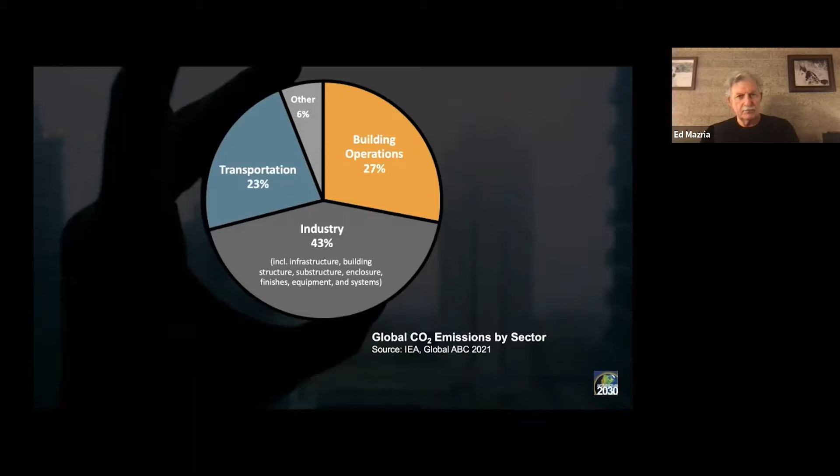This is how we usually see global CO2 emissions by sector. Building operations is 27%, transportation 23%, a little bit less, and then industry is the big one at 43%. If we tease out the building sector and the built environment from industry, then we see that building materials and construction, the core and shell, is another 10%. And the additional construction, site work, infrastructure, HVAC, that's an additional 10% as well.

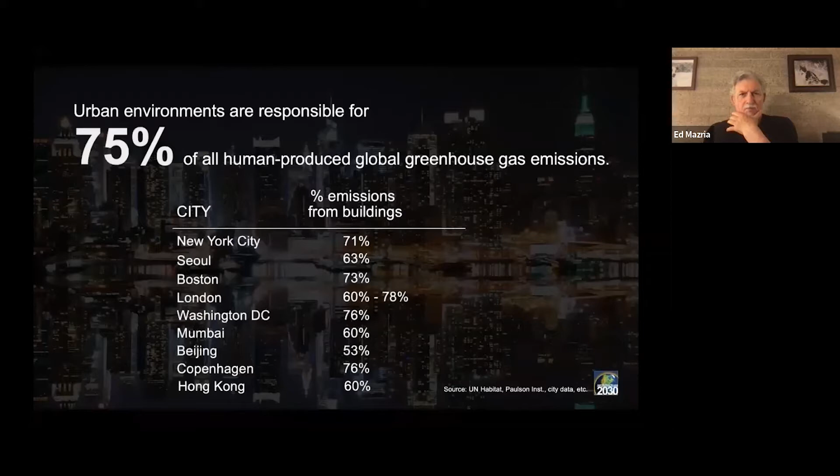So we see that almost half of all global emissions are attributed to the built environment, and most of it to buildings. We also know that urban environments are responsible for 75% of all human-produced global greenhouse gas emissions. And of that, most comes from buildings in urban environments, in cities. You could see New York City, 71%, Copenhagen, 76%, Hong Kong, 60% of all its emissions come from its buildings. So buildings are critical in getting our emissions down.

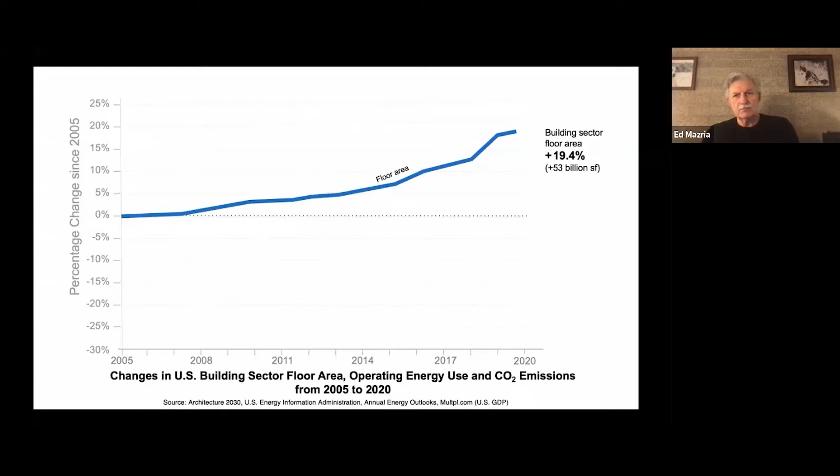Now, this is something historic that has taken place since 2005. This is the US. The US since 2005 has been building. We had a little slowdown with COVID, but we continue to build. From 2005 to 2020, we added about 53 billion square feet to our building sector. Our buildings' floor area grew about 19%.

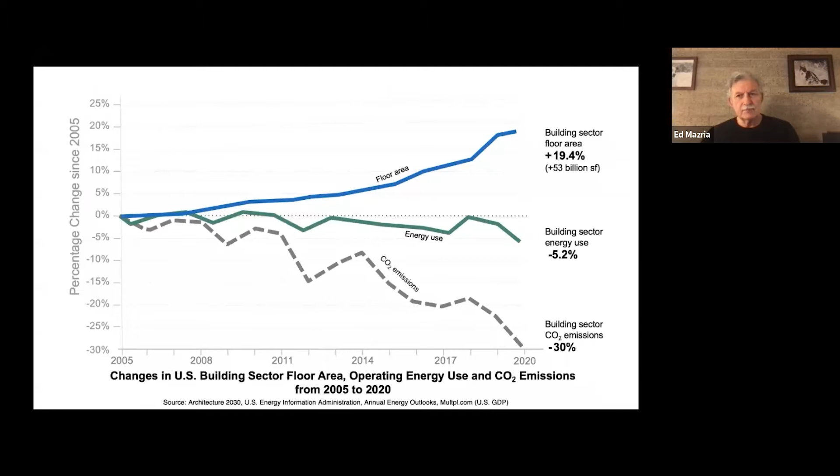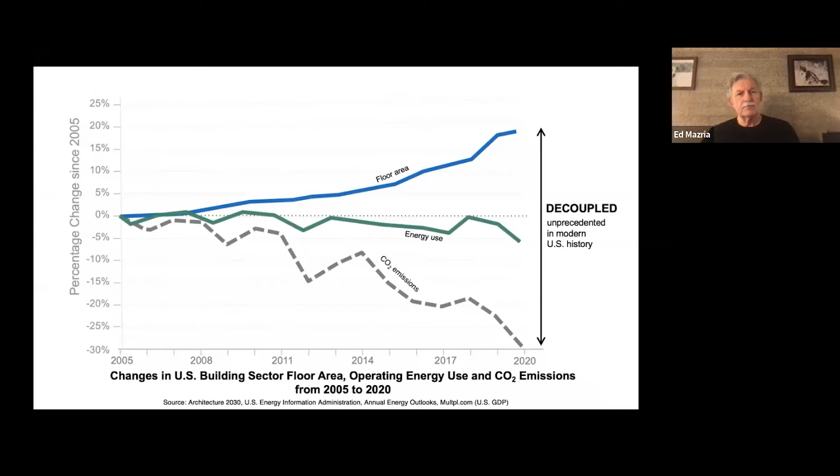This is energy use and CO2 emissions in the building sector. Our energy consumption in all our buildings in the US from 2005 to 2020 went down about 5%, and emissions dropped way down, 30%. So our emissions today are 30% below where they were in 2005 in building operations. That decoupling of being able to build, grow, and reduce emissions is historic. We have never seen that happen before. If you build, energy consumption goes up, emissions go up, that's the way it's always been. But all of a sudden, we're seeing a disconnect.

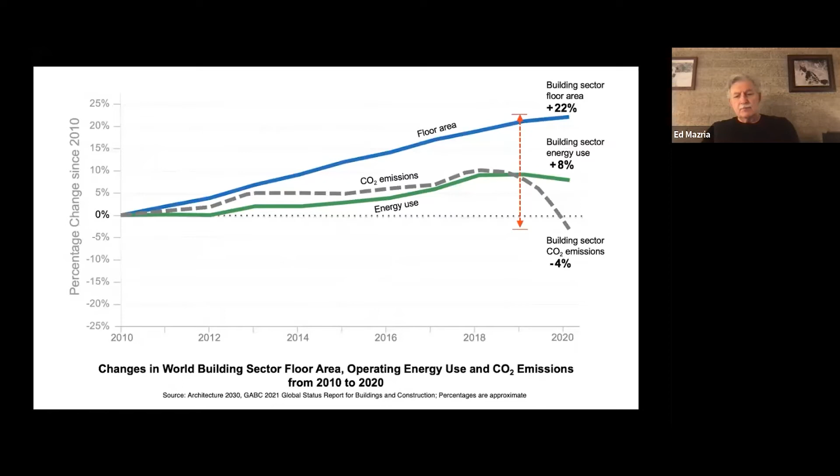But all of a sudden, energy consumption from 2018 roughly flattens out and then slightly goes down due to COVID. But it's essentially flat, even though floor area is still going up, even during COVID. Energy consumption remains flat. And look what happens to emissions from 2018 on: it starts to drop pretty dramatically. We're starting to see a decoupling worldwide, which is really very positive in the building sector.

So how did that happen? What's going on? Well, solar became the cheapest electricity in history in 2019-2020. And in 2020, renewable energy was the only energy source where demand increased, while the consumption of fossil fuels began to decline. So we began to see a shift away from fossil fuels to renewables.

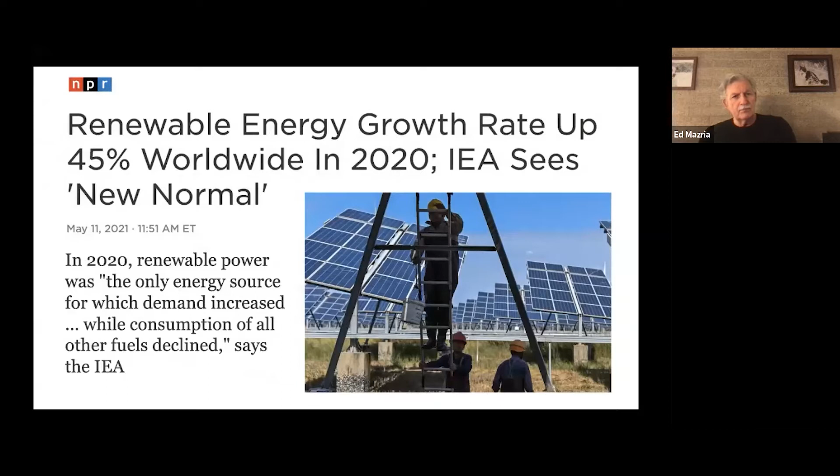And we don't see that changing anytime soon. In 2022, we expect a historic level of solar and wind energy. So let's take a look at how this has happened.

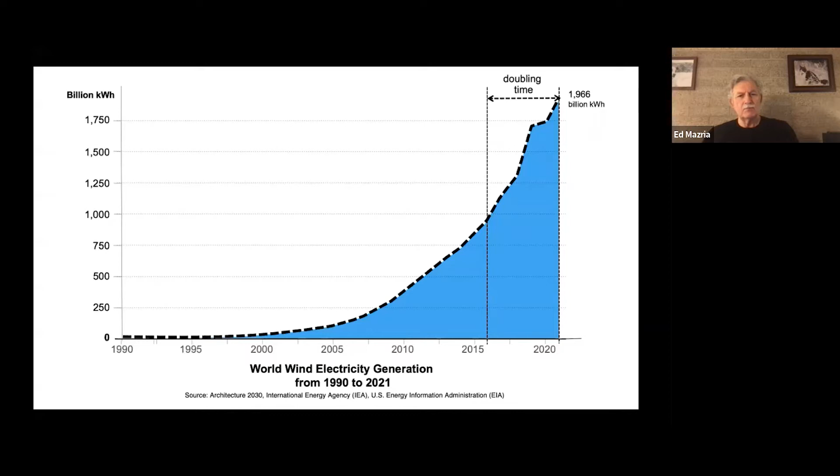This is world wind electricity generation from 1990 to 2021. You can see it starts out almost nothing, and then all of a sudden in 2005, 2010, it takes off. We see an explosion, with a doubling time of roughly 5 years. We've actually doubled the amount of wind electricity generation in the world in 5 years, and that is expected to continue.

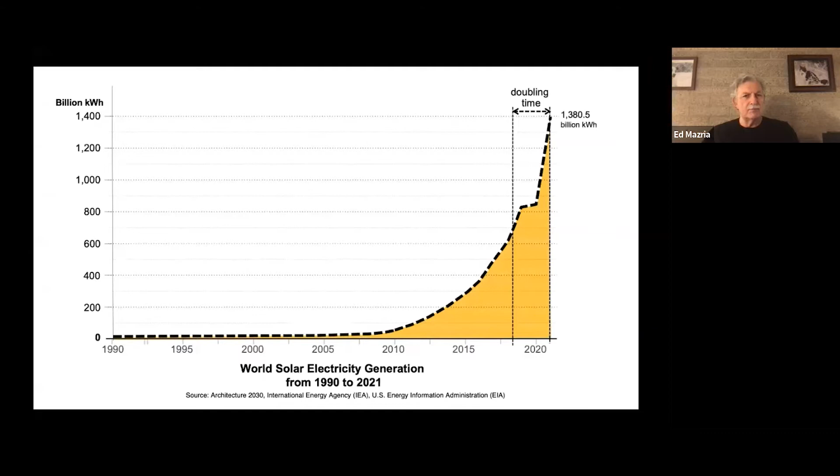What about world solar electricity generation? Well, you see the same thing. It starts out very small and doesn't even get started till about 2010-2012. And then we see an explosion - in 2 to 3 years we see a doubling of worldwide solar electricity generation. And that's because it has become the cheapest form of electricity generation worldwide.

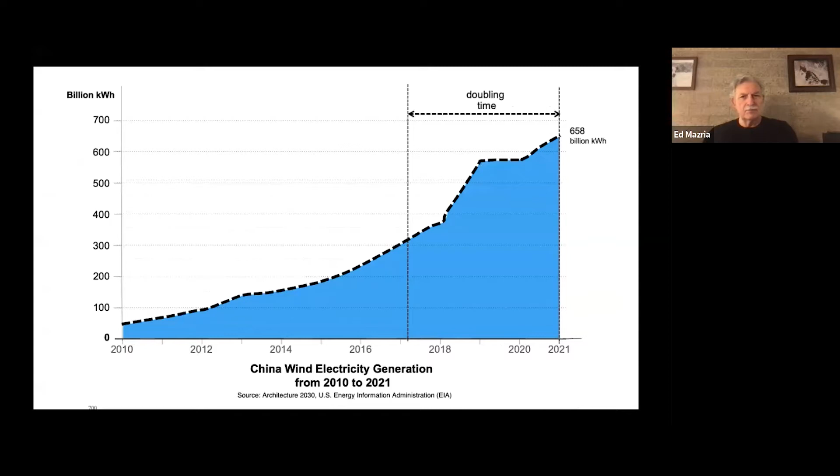What about China? We see the same explosion. This is just the last decade, from 2010 to 2021. We see an explosion in wind electricity generation in China, a huge amount, and we see the same thing with China's solar electricity generation. So China's also building out renewables at an incredible pace.

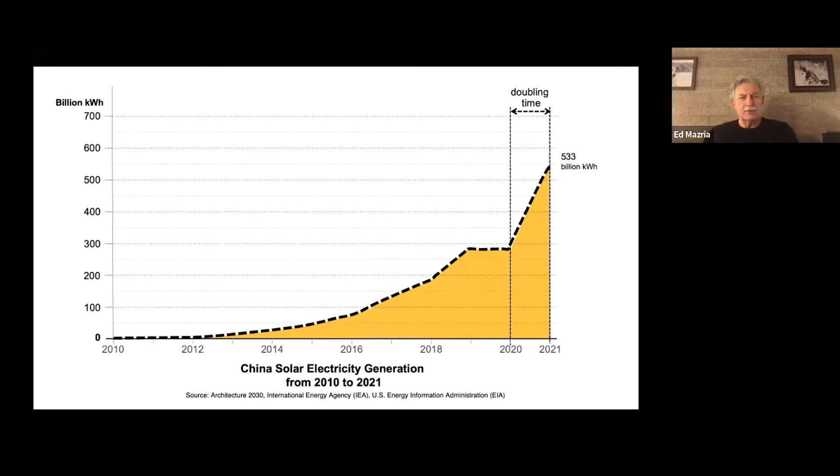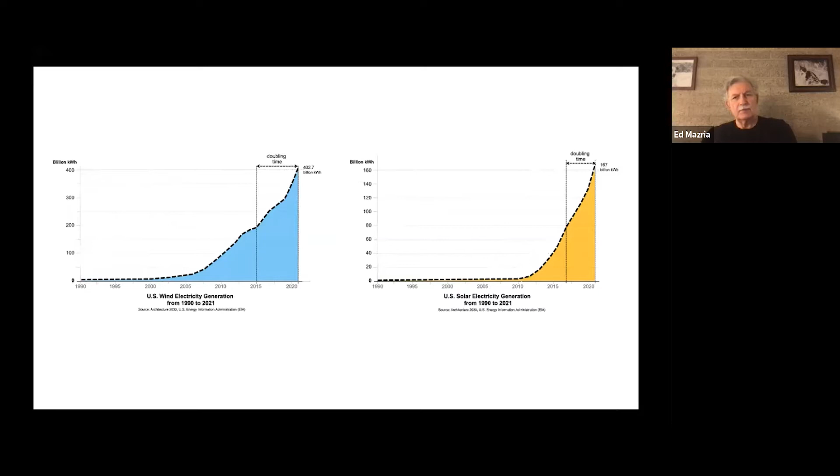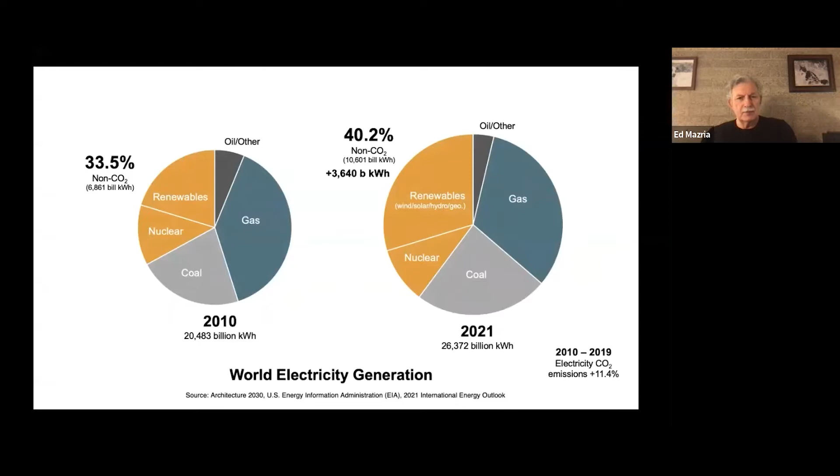This is world electricity generation, 2010 to 2021. We see that in 2010, renewables and non-CO2 emitting electricity generation was about 33% of total electricity generation. In 2021, it's moved up to slightly over 40%. The problem is we've increased the amount of electricity we need. Renewables supplied part of it, but coal and gas also increased. So emissions in electricity generation increased by about 11%.

What about China? You can see on the left, in 2010 it was mostly coal - 21% was non-CO2 emitting: renewables, nuclear, and hydro. So it was a small percentage. Then there was an explosion from 2010 to 2020 in electricity generation in China, and renewables picked up almost half of that explosion. The bad news is coal picked up the other half, and electricity CO2 emissions went up 32%.

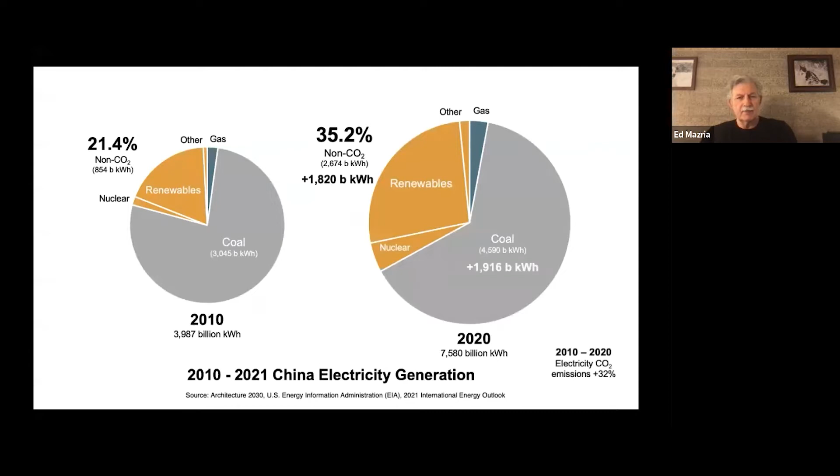So what do we do? How do we get a handle on all this? And can we meet the 1.5 degree C carbon budget? As I said, I think yes. I don't think it's that difficult, and I'll tell you why.

We need to do 3 things to get the entire built environment under control and to zero emissions. We need to address new buildings, existing buildings, and then materials, construction, and infrastructure - what we call embodied carbon. Let's begin with new buildings - that's building operations. How do we get that under control?

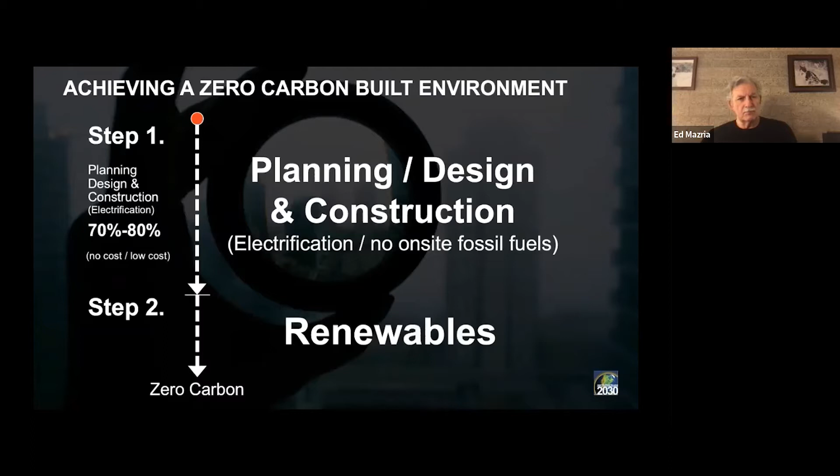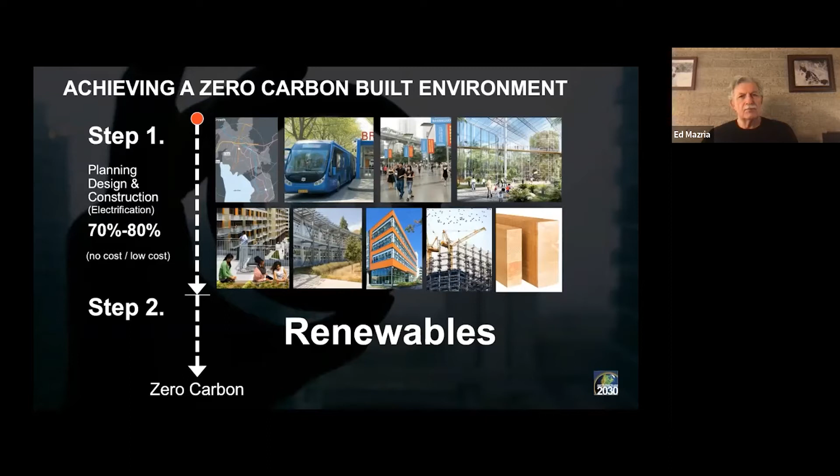Well, it's a 2-step process. Step 1 are the things we do: planning, design, and construction. It's a no-brainer - you electrify, no on-site fossil fuels. If you do that, you can get 70 to 80% of the way to zero carbon, at no cost, low cost, or even cost savings. You do that through how you plan developments, cities, walkable communities, bring agriculture into the cities with urban agriculture, how you design and orient buildings, where you put the glazing, how you shade buildings, natural ventilation, and the types of materials you use. You can get a 70 to 80% reduction just through design strategies.

Then step 2 is you make up the rest with renewable energy - non-fossil fuel energy, no on-site natural gas, no coal - you do it all with renewables, because you bring your energy consumption so low that it's easy to then do it with renewables. I'll show you that in a minute. You do it with on-site solar, you can do it with wind, utility-scale solar, wind, geothermal, hydro.

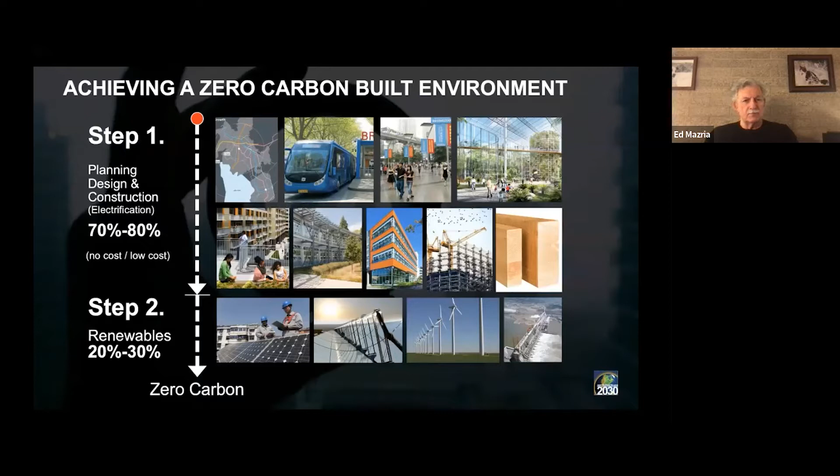There are all sorts of strategies we can use to make up the energy consumption that the building sector and the built environment needs. In terms of planning, it's been outlined for China, for example, low carbon cities. There are 8 to 10 different strategies used to develop planning guidelines for new development in China. That's available.

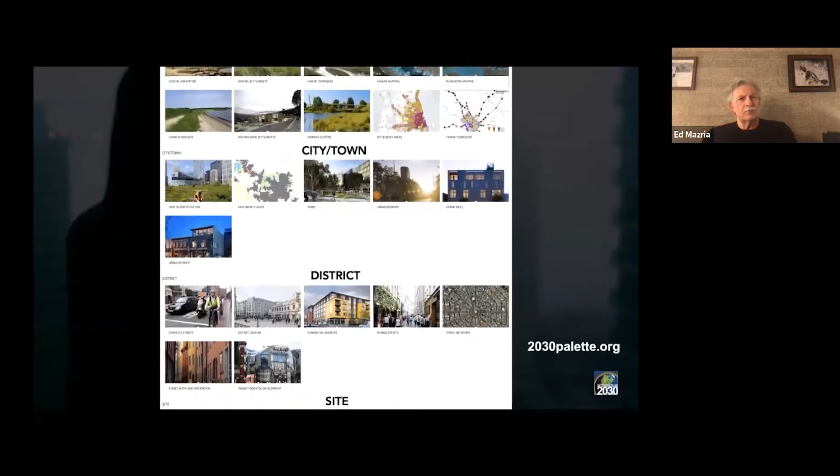There's also the 2030 palette, which contains many of those same strategies, everything from how you develop out a region, how you look at a region, city, town, how you plan districts for transit, site work so that you sequester carbon, and then how we look at buildings, the building shape, daylighting strategies, passive heating and cooling strategies, and materials. It's all contained in the 2030 palette, available online at 2030palette.org.

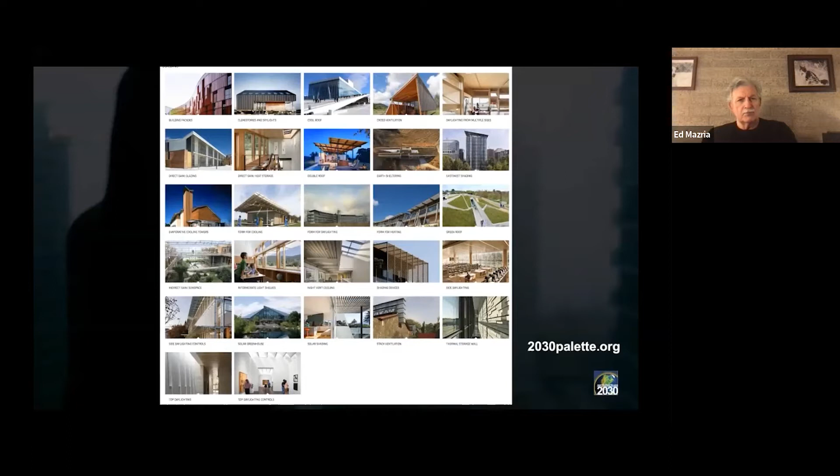So we know all the strategies in order to design very low energy and low carbon buildings, and we also have codes now. It's a simple two-step process to design a zero carbon building.

First, just design an efficient building. Meet the latest code standards - they're usually pretty good, or you can find a good one if the code in your area isn't good. But most building energy codes now are pretty good and will give you a fairly efficient building. Then you can add all those strategies we talked about - daylighting, passive heating, cooling, ventilation - and get the energy consumption of a building down even more.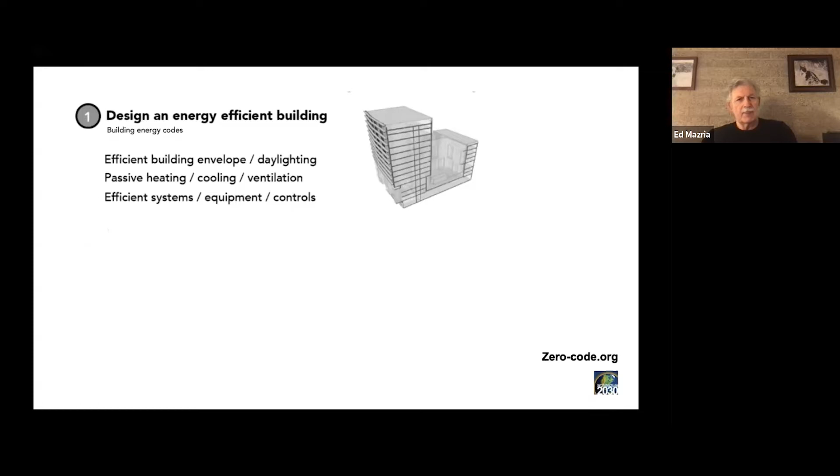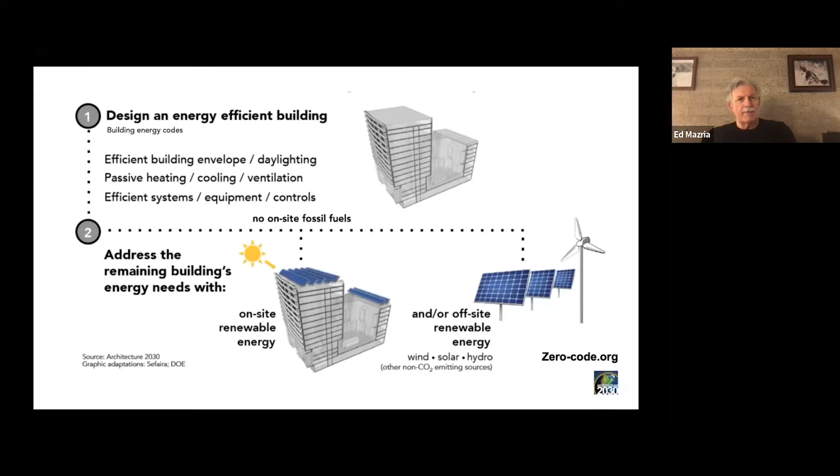So that's the first thing: design an efficient building using the codes and all the strategies you have available that don't cost anything. The second thing is no on-site fossil fuels. Address the remaining building's energy needs with on-site renewables, on-site solar. If you can't do it that way, do some of it that way and bring in the rest off-site as renewable energy. In that way, you've designed and built a zero carbon building.

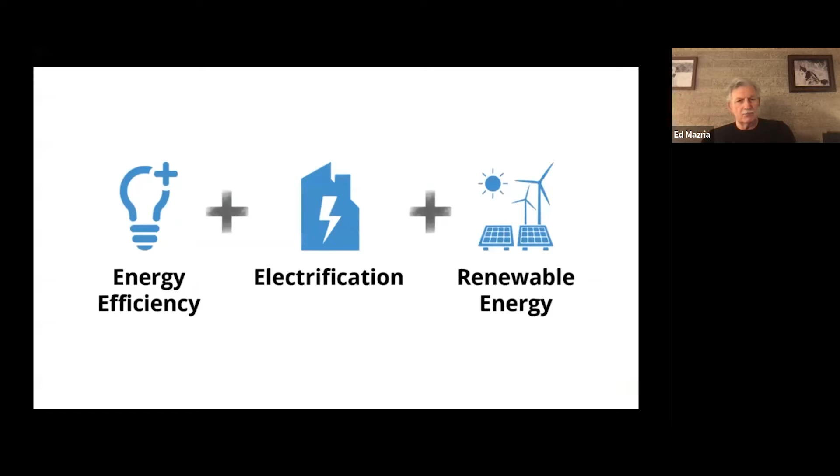What about all those existing buildings? There are literally hundreds of thousands and millions of buildings worldwide. How do we get those to zero carbon? Well, the formula is exactly the same. We renovate them for efficiency when we can, we electrify them, get rid of any on-site fossil fuels, and then bring in renewable energy, either on-site or off-site, to get them to zero carbon.

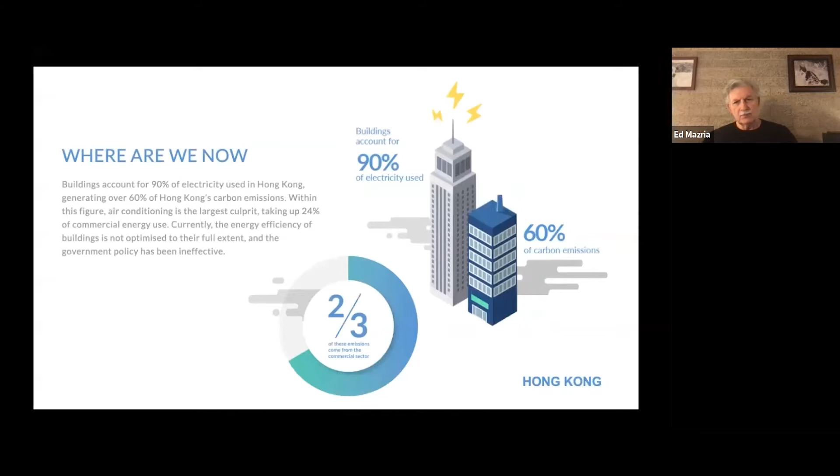In Hong Kong, we know that 90% of the electricity used goes just for buildings, which are responsible for about 60% of all Hong Kong's emissions. The other thing we know about Hong Kong is that two-thirds of all emissions from the building sector come from the commercial sector, and many of these are very large buildings responsible for a lot of emissions.

So we can develop a two-step process. We can take those large buildings and figure out where they are, how many there are, to get to about 50% of total emissions - it won't be that many because they're so big. We require them to get to zero carbon by 2030 and give them incentives to do it, giving them plenty of time so they'll hit a capital improvement cycle where they can get rid of any on-site fossil fuels and electrify.

Then you have many smaller buildings responsible for the other 50%, and you give them all the way to 2040, looking for intervention points when you can get them to go all electric and eliminate any on-site fossil fuels. Give them incentives when they renovate or change out equipment, and require, for example, at point of sale, that if you sell a building, you have to bring it up to zero carbon standards. In that way, by 2040, we've transformed the entire building sector in a city.

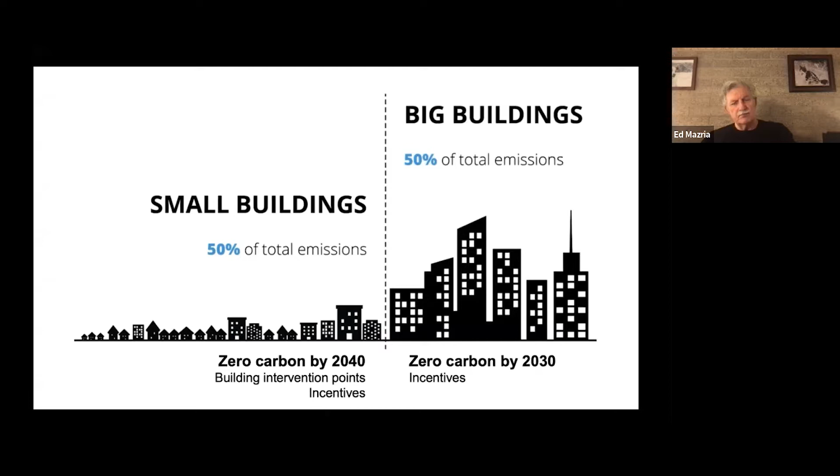What about all those materials, the construction and infrastructure that goes along with buildings? There are literally hundreds of thousands of choices of materials, and we have to get them all to zero carbon in order to phase out CO2 emissions by the year 2040. How do we do that?

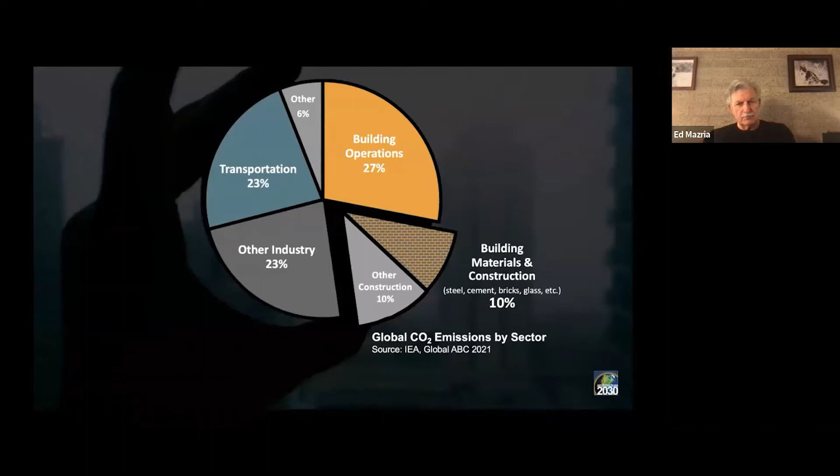Well, this is the pie chart we looked at before. We see that building operations is 27%, and construction and infrastructure is another 20%. But there are literally hundreds of thousands of materials within that 20%. What do we do? Well, we reshape the pie a little bit, and we see that in the entire industrial sector, two materials - just steel and concrete - are responsible for half of all industrial emissions.

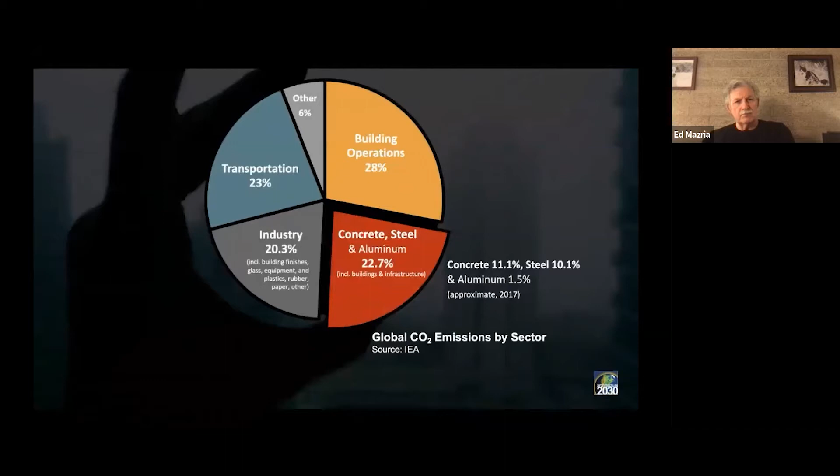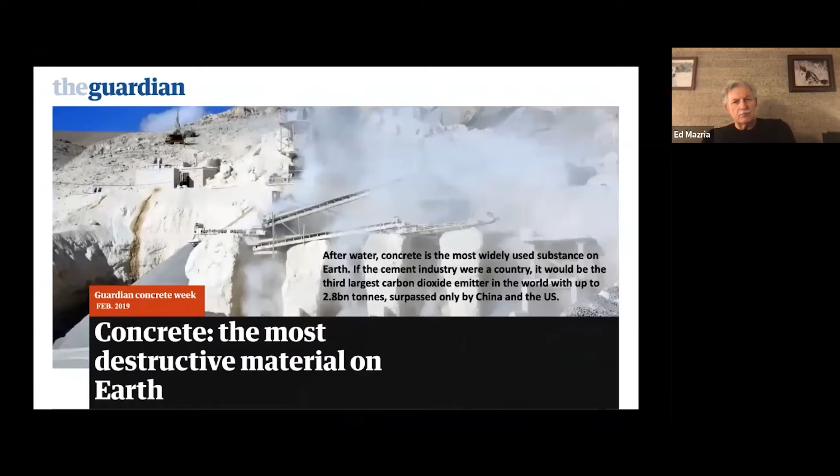If we focus on those two, we can get huge reductions very, very quickly. The first thing that has to happen is everyone needs to know that those two materials are huge when it comes to emissions, and we see that now. Beginning in 2019, it became known that concrete produced a huge amount of global emissions. We've seen lots of publicity and articles about concrete and steel. So there's a lot of pressure building on those two materials to decarbonize, and we're starting to see that.

Especially in the global north, there's also competition from glue laminated and cross laminated timber, mass timber buildings. We're starting to see mass timber used in high-rise buildings, and that's pushing concrete and steel to decarbonize even faster. So that's the good news.

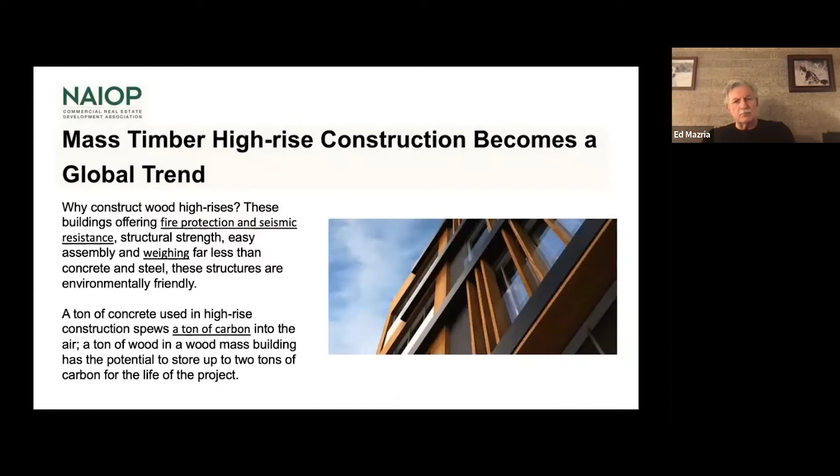So what can we do as professionals, as architects and planners and policymakers? Well, we can look at the sector three ways: reuse, reduce, and sequester. Let's talk about reuse. The greenest building, development, or neighborhood is one that's already built.

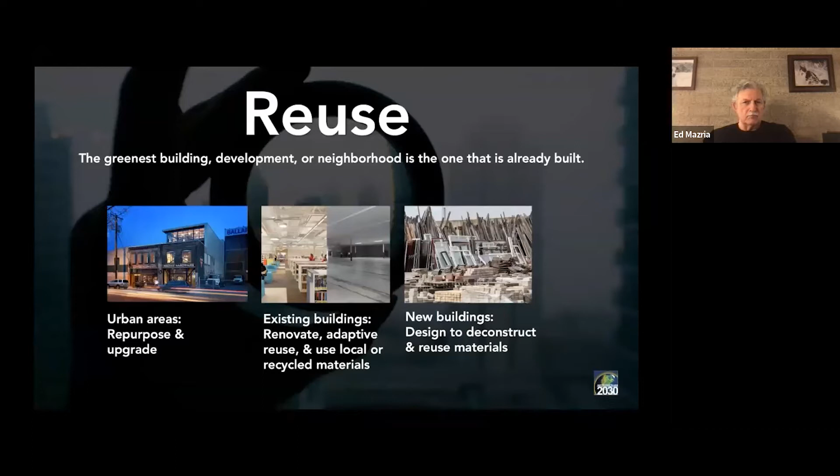This way you don't have to build out all the infrastructure. You just repurpose it and upgrade it. You use lots less material, lots less transportation, and you cut down on your embodied carbon dramatically by doing that. Renovating existing buildings - after COVID, we're beginning to change how we use buildings. So reusing them and redesigning them using recycled materials is another option. And we can build our buildings so that when their useful life is over, we can at least reuse the materials so we don't have to keep rebuilding those materials. So reuse is one of the options we have.

The other is reduce. Growth boundaries - we talked about urban planning, infill and densification, so that we use the existing infrastructure that we have. We optimize it. We can optimize building structure also, specify low carbon materials. We have lots of programs now coming out that will compare the different amount of carbon in making different materials so we can select lower carbon materials. And we're beginning to see public policy shape around that.

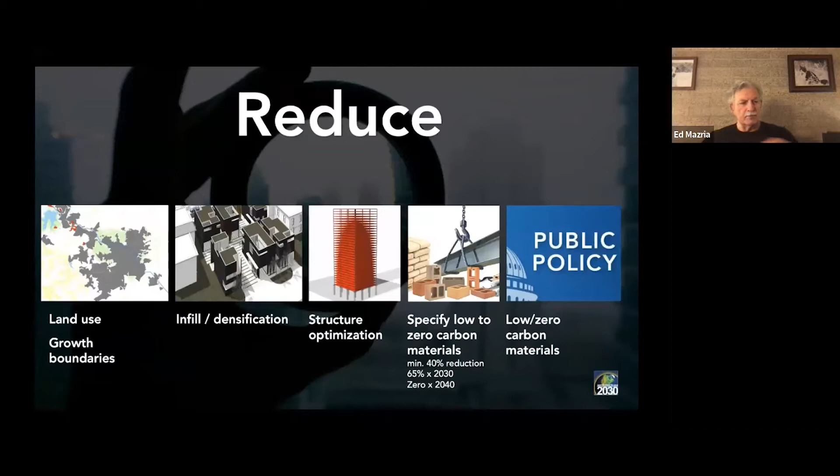The last thing is we can sequester carbon. We can actually draw down carbon by using, for example, timber, or in the global south, we're beginning to see a nascent industry grow up in glue laminated and cross laminated bamboo, which is actually stronger and more flexible than mass timber. We're beginning to see injecting CO2 into concrete, making aggregate out of CO2 emissions and changing its properties. So actually drawing down CO2 and looking at biomaterials made with renewable energy rather than fossil fuel energy.

And all of a sudden, we're beginning to see an explosion in landscapes, soil, and urban agriculture, where landscape architects now are looking at how to actually draw down carbon in their site work and in cityscapes. So there's all sorts of strategies that we can bring to bear on this subject.

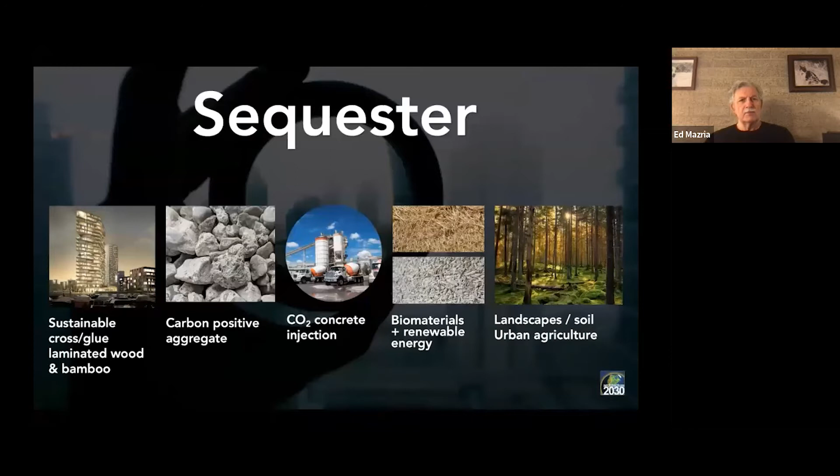I want to leave you with this. This is the amount of solar energy that falls on a square meter in a year on a surface. Just a square meter. And this is Singapore, Hong Kong, Sydney, New York - so from way south to way north.

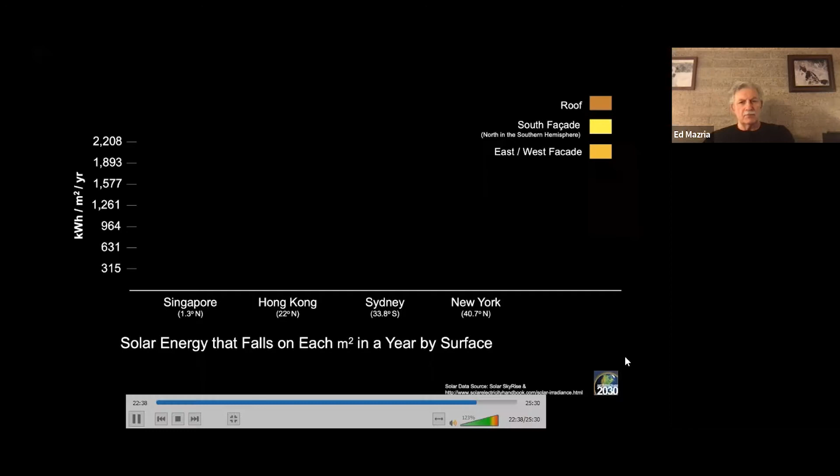In brown is roof - this is how much falls in kilowatt hours per square meter per year on a square meter. In brown on the roof, yellow on the south on a square meter of south facade, and then a cross between yellow and brown, east and west facade, a square meter. I'll put this in play - so this is how much energy you get on four surfaces in a year in kilowatt hours per square meter.

Now, how much energy per square meter, again in kilowatt hours per square meter per year, does a building need to operate if it meets a relatively good code standard? Doesn't have to be the best, but a decent code standard like ASHRAE 90.1 2016. Well, you're looking at somewhere between 100 kilowatt hours per square meter to probably upward of 140 kilowatt hours per square meter, whether it's an office building, apartment building, or school. So on the right, in those red bars, that's how much energy you need to operate a building if you just use a good code.

If you look to the left and look at Hong Kong, that's how much energy you get in a square meter. So that's a square meter of building operations on the right, and a square meter of how much energy actually strikes a surface in a year per square meter in Hong Kong, on the south side, on the roof, and on the east and west facade.

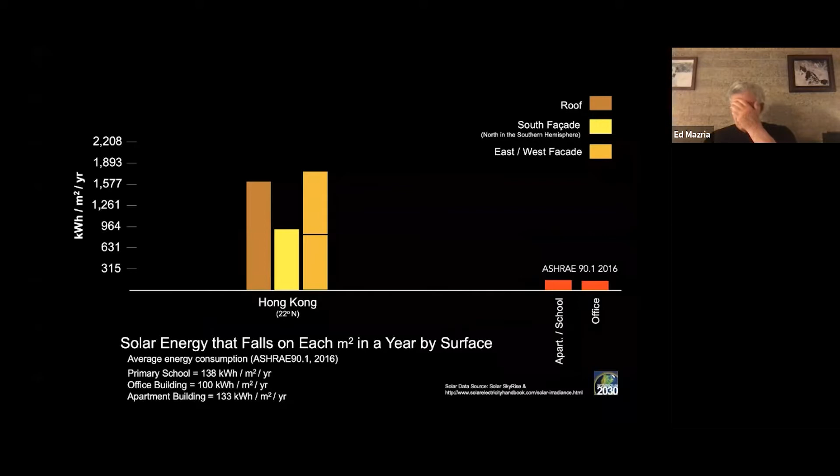There is so much additional energy that falls on a building that we can now capture. We're looking at all sorts of things: vertical panels on the east and west side, photovoltaic panels on the roof. We're looking at solar glazing now, an industry that's just starting up, where the glass actually generates electricity when the sun shines on it. So there are all sorts of ways to do this.

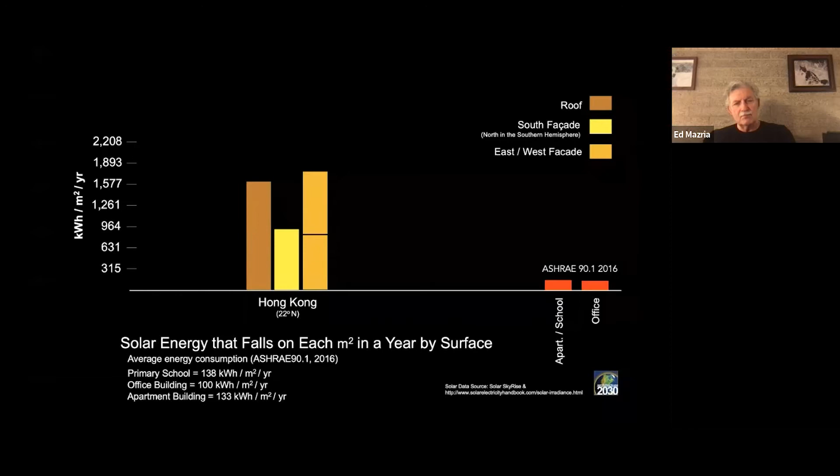So that's how much energy we get free, delivered free to pretty much every site if it's unshaded, on the left. And that's how much we need on the right to operate a square meter of building. Of course, we can solve this problem. If we move forward together and begin to implement our design strategies, planning strategies, and use non-fossil fuel, non-CO2 emitting energy, especially renewables, wind and solar, we will keep 1.5 degrees C alive. Thank you so much.

Thank you so much, Ed. Fantastic. So many positive messages in there about how we can really go forward, have a clear roadmap and real-time solutions. I think there are some questions that have risen up.

Maybe I'll start them, and I encourage all of our colleagues listening and joining us today to share your own questions in the Q&A, and we'll get them all to Ed - we have plenty of time for that discussion, which is wonderful. I guess just starting with the first facts that you shared, it's phenomenal that wind energy has doubled over these last 5 years, and solar energy has also doubled over even a shorter period. So much is happening that can really reduce emissions. Of course, this is as long as we can continue to reduce our own needs and make sure that fossil fuels reduce not only by percentage, but in a measurable amount.